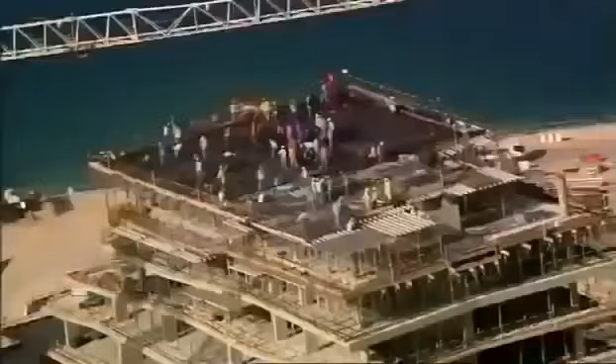Abu Dhabi, the richest city on the planet. It wants to join the City Super League and is undertaking an incredible transformation, building this extraordinary skyscraper, Aldar HQ. Nothing like it has ever been attempted. It'll be a race against the clock. Will this megastructure push even Abu Dhabi to the limit?

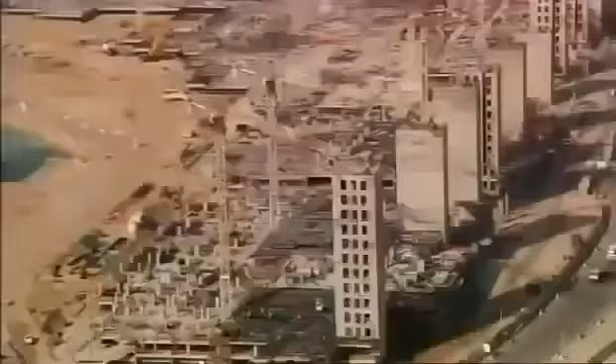Abu Dhabi is in the midst of a construction boom. It's the largest of 7 sheikhdoms known as the United Arab Emirates. Its capital, also called Abu Dhabi, is the richest city on earth. Its ruler, Sheikh Khalifa, has a cool $875 billion in the bank and an audacious spending strategy to match. He wants to transform the skyline and compete with the international elite of London, New York, and Hong Kong.

But this is not the first time the Emirate has stood at the crossroads. Just decades ago, Abu Dhabi was a desert backwater, until the discovery of oil in 1958 brought unimaginable riches to its ruler, Sheikh Zayed. As the petrodollars flowed in, he converted the shell houses into high-rise, and the traditional way of life was swept away.

Today, Abu Dhabi is a thriving metropolis, sitting atop the world's 5th largest oil reserve. But black gold alone cannot put this city in the Super League. To do that, Sheikh Khalifa must lure big business and tourist dollars. Abu Dhabi must expand to thrive.

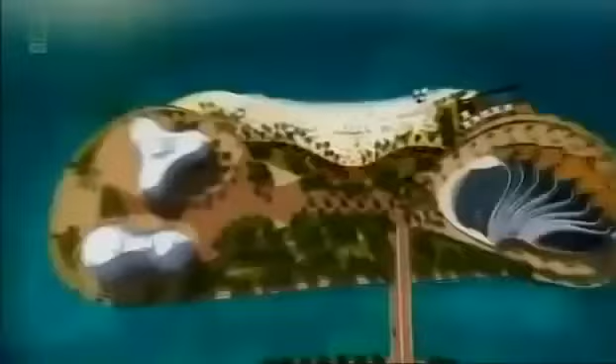To put Abu Dhabi on the world map, fledgling property developers Aldar plan a whole new micro-city, Al Raha Beach. It's an ambitious proposal. At 11 kilometers long and almost a kilometer wide, this city on the sea will be the biggest project ever attempted in Abu Dhabi's history. Mohammed Al Mubarak is in charge of delivering this audacious development. The vision of their highnesses and the vision of Aldar was to create this almost mini city where people can live, study, play, and work in one destination.

Al Mubarak must attract investors if Al Raha Beach is to succeed. So to launch the project, he commissions a signature skyscraper. Creating an iconic structure on Al Raha Beach was of vast importance on basically putting Al Raha Beach on the world map. Al Mubarak sets Lebanese architect Marwan Zgheib the task of designing an icon that raises the stakes even higher. The building will become Aldar's headquarters in the heart of their colossal development.

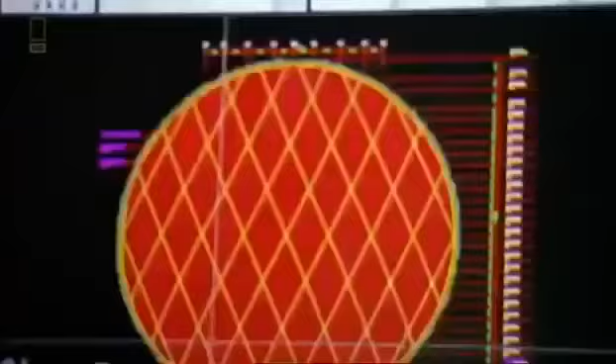But creating something new in a land where the iconic is the everyday won't be easy. Neighboring Emirate Dubai has taken center stage with a number of headline-hitting projects. The world's tallest skyscraper, Burj Khalifa, the Palm, and the World, and the emblematic Burj Al Arab. To stand out from the crowd, Zgheib knows he must redefine the extraordinary. Simple can be powerful sometimes, and especially in architecture. You can see it since the pyramids of Egypt. Most of the iconic buildings are very simple buildings.

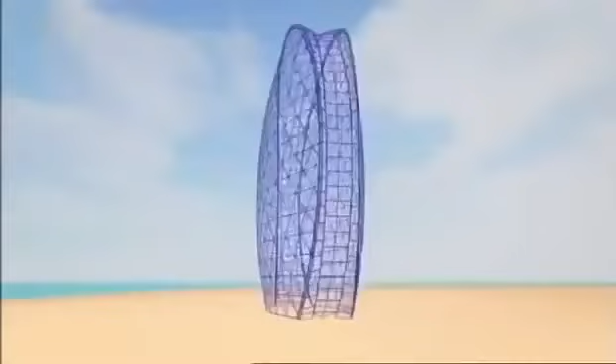But it isn't until Zgheib is relaxing on a plane that he has a brainwave. But I couldn't sleep, so it was a moment of relaxation, you know. And then the idea came simply. So I took a pen and I drew it on a sketchbook. The design is simple but daring. A round skyscraper taller than the Statue of Liberty, with a curved glass skin covering the area of 4 football fields. To be honest with you, the moment I imagined it, I knew it was a winning concept. I knew it was something different.

In fact, the design is so unusual, Al Mubarak initially doesn't know how to react. And when I first looked at the MZ design, I was a bit confused in the beginning, to be honest with you. I felt like I was looking at a comic. I felt that this was a flying saucer and basically it landed on Al Raha Beach. And I just kept on staring at it for like another 15 minutes. And after 15 minutes, I just fell in love with it.

Zgheib's design is inspired by nature. 2 giant circular curved walls of glass mirror an open clamshell. Architecture is nothing but imitation of nature. At the beginning, the idea was so geometrical, very pure. It's like a seashell. The seashell has deep meaning for Abu Dhabi with its seafaring heritage.

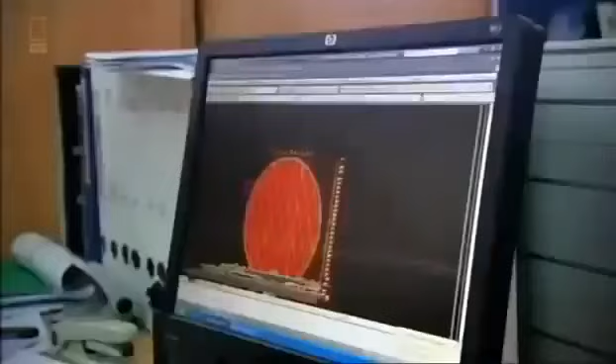But a circular design poses a problem. Just like a coin that stands on its edge, it risks being unstable. The circle must be balanced. So Zgheib turns to some very old school geometry. The real challenge of the circular facade was to find the 2 points where the building should pose on the ground. And for that, I had to go back to one of the oldest rules in architecture, proportion. When you have a circle, you can divide it into a pentagram.

And that pentagram, in fact, is a representation of the cosmic body of the human being. So you can put a man in that pentagram, the man and the universe. So the pentagram will define the 2 points of the circle where the facade will lay on the ground. And this will create the perfect balance.

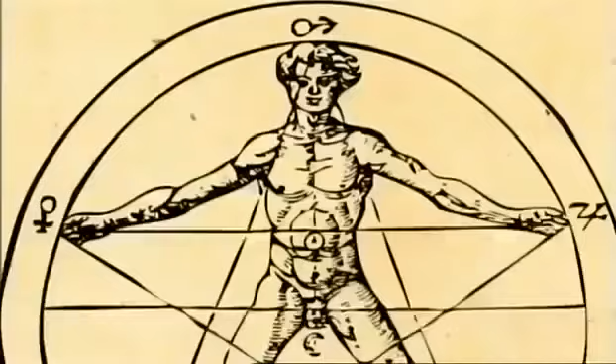It was the same thinking that led 16th century philosopher Heinrich Agrippa to draw man as a pentagram inside a circle, and has helped architects to proportion buildings for centuries. But it's not the skyscraper itself that poses the first major challenge. It's the proposed site. They wanted to show me the site, but all you can see was the sea, nothing but the water.

Unbelievably, the solid ground required for Aldar HQ does not yet exist. The desired location is 700 meters out in the Persian Gulf and 8 meters underwater. New land must be created. Over 3 million cubic meters of sand must be found. Surely a simple task with Abu Dhabi's endless desert dunes.

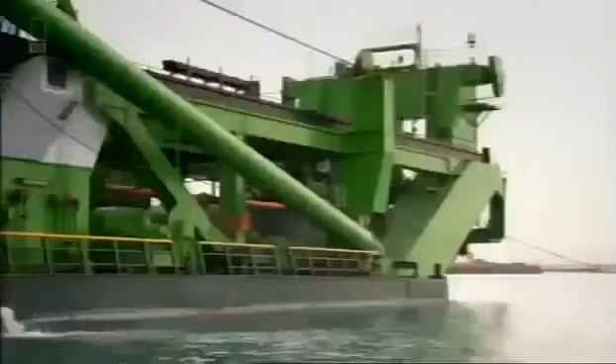But desert sands are too fine to build with. The land would just slide into the sea. Marine sand is needed. Its larger grains help it stick together, creating the perfect base to build on. Dredging sand from the seabed is one solution, but fortunately, the late Sheikh has already done the job for them.

Whilst cutting a shipping channel in the late 1970s, Sheikh Zayed created an island of discarded sand. Luckily for the engineers, it's just across the water, so they decide to move all 20 million cubic meters of it. A fleet of cutter dredgers eat their way into the island.

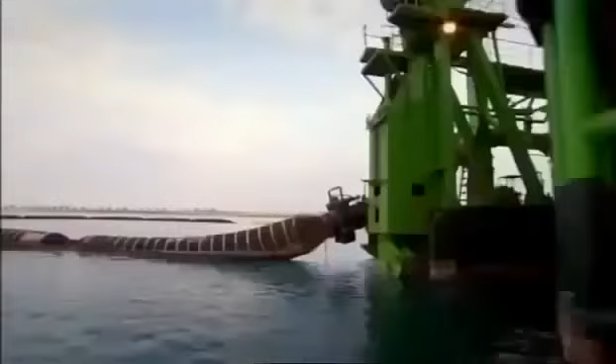These are no ordinary dredgers. It takes an enormous claw layered with 48 reinforced steel teeth to slice through the hardened sand. The sand is pumped through a floating pipe to the construction site. Here, excavators toil 24 hours a day to flatten the virgin ground. After 8 months, the land for Aldar HQ is fully formed, and with this, the first major problem overcome.

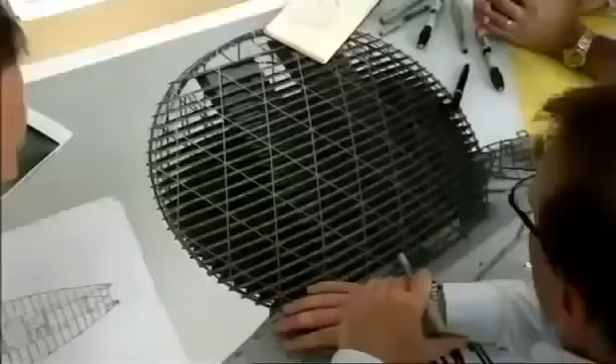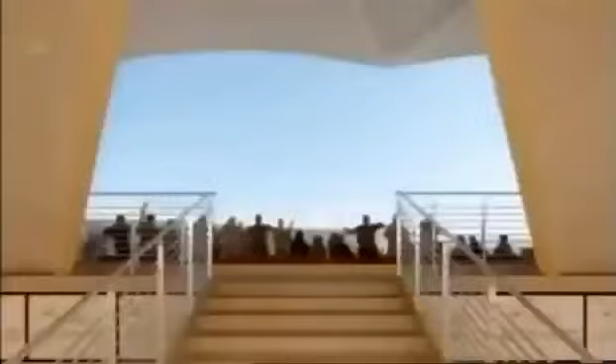Aldar want their skyscraper completed by an astonishing deadline. In just 30 months' time, the eyes of the world will be on Abu Dhabi when it hosts its first Formula One Grand Prix. The racetrack will be on its own designated island, complete with hotels and theme parks. And Aldar are building the lot.

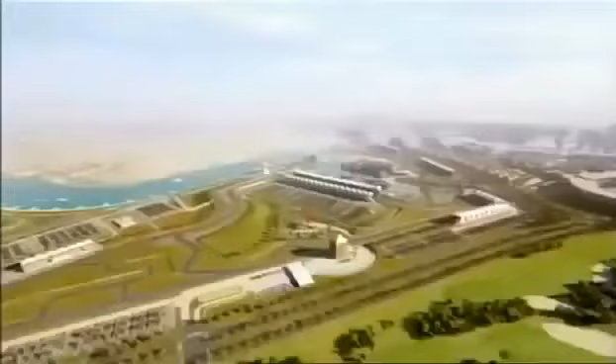The international press and tens of thousands of visitors will descend on the city. It's the ideal opportunity for Aldar to showcase their new HQ. But to stand any chance of meeting this target, the team will have to pull out all the stops. Just 1 month after design has started on Abu Dhabi's round skyscraper, the construction team arrive on site to begin foundation works.

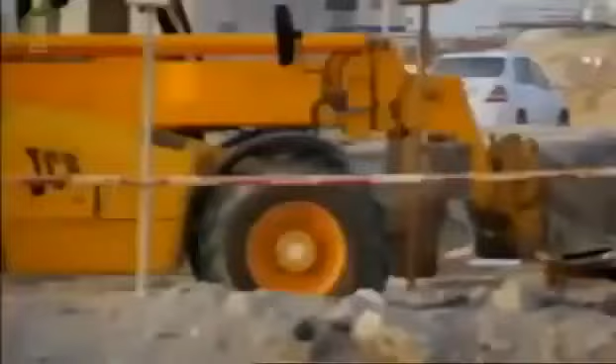For construction manager Miles O'Sullivan, the schedule is a shock. With the design not complete and being told you're going to pile in 1 month, almost crazy. But it's not just the first deadline O'Sullivan has to worry about. Aldar HQ's round curved shape presents an enormous sail-like area when wind strikes. Wind tunnel tests must be done to prove the foundations can take the strain. But the results won't be back until work has already started.

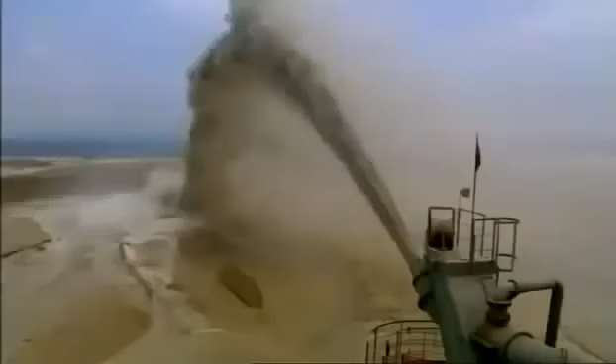Abu Dhabi is regularly hit by high-pressure winds that sweep in from the Persian Gulf. But building Aldar HQ so close to the sea will put the foundations under another kind of pressure. Digging for Aldar HQ is very similar to digging here in the sand. As you dig down, you'll get to see the groundwater starting to surge through the sand. And in fact, it's that groundwater coming through the sand here that's creating the pressure and obviously creating the issues for us when we do the construction.

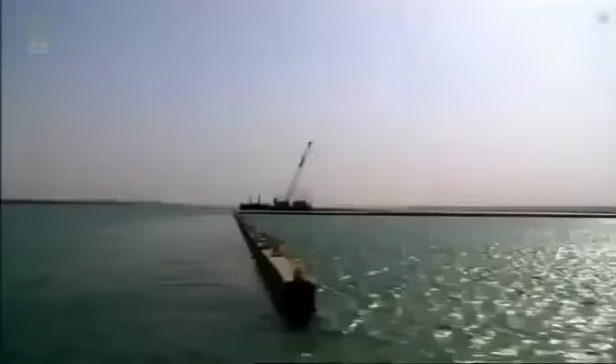The upward pressure of the water and the loose sand pose a problem for foundation construction. Before excavation can begin, the team must build a solid barrier called a diaphragm wall or D-wall. It's a concrete barricade formed of interlocking panels which socket into the bedrock and reach 16 meters below the surface. The D-wall holds back the loose sand and the surging seawater, ensuring the ground inside the barrier can be removed. These areas here, what are these?

The D-wall must be built before the foundations can be laid. But with the blueprint above ground a work in progress, the team can only hope that over-engineering the foundations will make them strong enough. The design calls for about 400 concrete piles that work in two ways. Half of the piles rely on friction with the ground to secure the structure to the rock and sand below, whilst the remaining piles drive deeper into the rock to dissipate the building's immense loads into the ground.

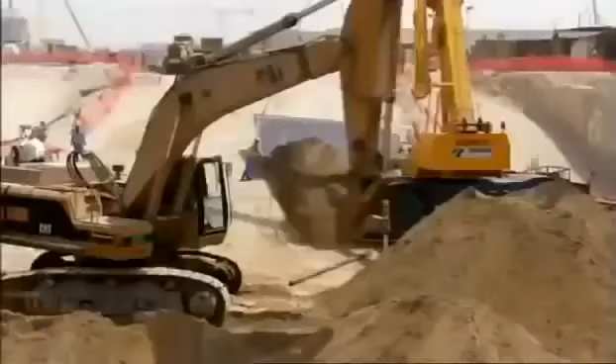On site, D-wall construction begins. It's the same process ongoing at this Abu Dhabi construction site.

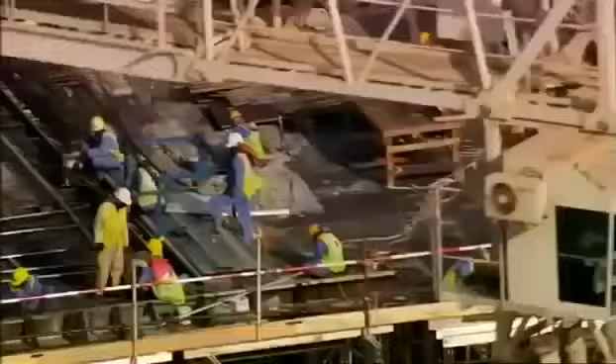Until recently, Al Raha Beach was just a vision for Aldar's Mohammed Al Mubarak, but the dream is slowly emerging from the sea. Seeing that land come up, seeing the amount of work and the amount of staff we had on the ground to make sure that was going to be done, that was like watching Rome being built.

The D-wall and concrete piles create a firm foundation upon which to build Aldar HQ. But the force of the sea pushing up through the sand still poses a threat to the skyscraper. A great way of demonstrating the problems we faced at Aldar HQ with the groundwater is in imagining that this bottle here is Aldar HQ.

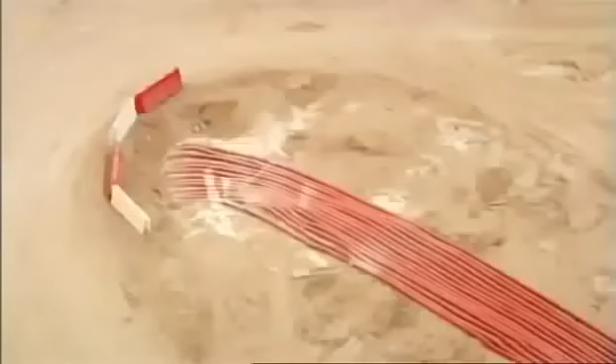And as I push the bottle down, you see forces are exerted on my hand. And in fact, that's the groundwater trying to push the building out, trying to push Aldar HQ out of the building site. To keep the site dry during construction, water is sucked out of the sand and pumped out to sea. But that's only a short-term solution.

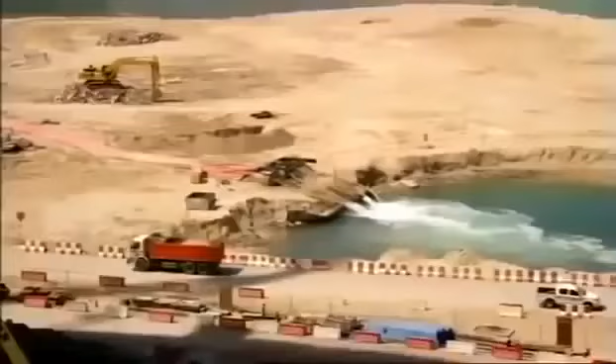To protect this skyscraper in the long term, the team need an extra defense. It's a giant slab of concrete called a raft. It creates a barrier against surging water, stops the piles from punching up through the building, and acts like a snowshoe to evenly distribute Aldar HQ's 59,000-ton weight into the ground.

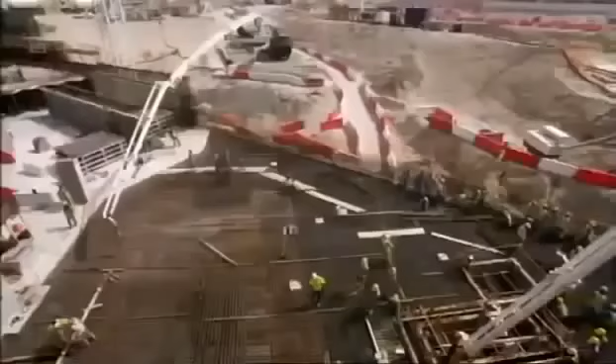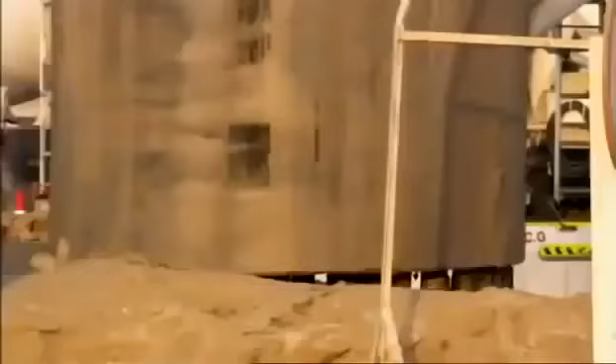Raft construction for Aldar HQ is 12,000 cubic metres of concrete, which is a 30,000-ton structure. It's a huge element. With 2,000 truckloads of concrete to pour, it's a job that continues into the night. But engineers are just getting to grips with the severe forces that will affect the piles.

The unique shape of the skyscraper will capture wind like the sail of a yacht. There are no guarantees the foundations will be strong enough to cope with the loads. The advanced construction works had to commence so quickly that we didn't have time to do the wind tunnel test. It was important that we did one, primarily because this is a unique shaped building.

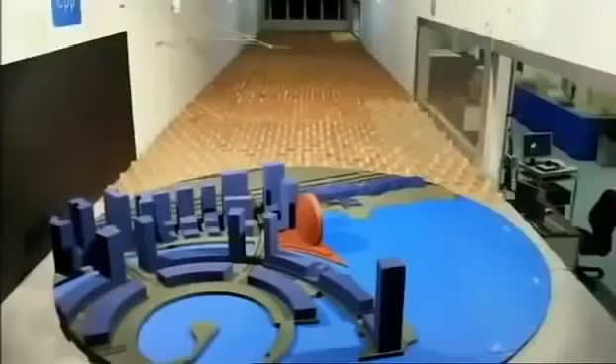Gibbons calls upon wind engineer Roy Denoon in Colorado, USA. He puts a scale model of the HQ through its paces in his high-tech wind tunnel. Right at the start, Craig Gibbons actually called me and said, "We've got something really unusual coming up. Can you take a look at it and give us your first best guess of what the wind loads might be? Give us some guidance on how to get to some loads for the foundations, because this is running on such a fast-track schedule."

Knowing that Gibbons is already building the foundations, Denoon wastes no time in firing up the fans. If the tests reveal the wind loads are higher than predicted, the foundations already in the ground may have to be redesigned. To be putting in the foundations before we could finish the wind tunnel testing, that always gives us a little bit of cause for concern. Denoon is right to be worried.

He knows how high-altitude wind impacts on very tall rectangular skyscrapers. But Aldar HQ's lower height means another type of wind is the threat. When we look at the really extreme wind speeds in the Middle East and in this region, we find that the highest, what we call gust wind speeds, the short events, are caused by thunderstorms.

Abu Dhabi may appear sun-soaked, but during the spring, the intense sun heats the moist air, causing spectacular thunderstorms. Wind speeds can escalate up to 137 kilometers per hour. The key issue with thunderstorms in this region is that they give the absolute highest gust wind speeds. Now, for the very, very tall buildings, that's not too critical because they occur down low. For Aldar HQ, they were really critical.

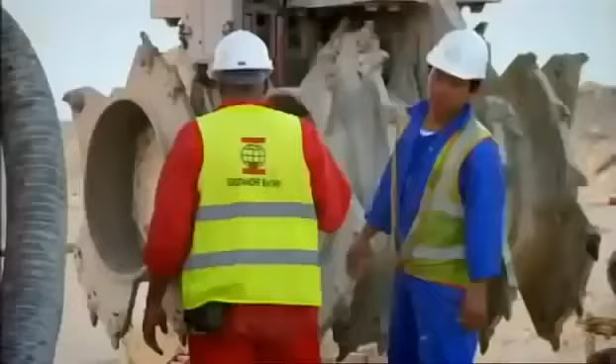The results of the wind tunnel test are great news, but the relief is short-lived. Now the structure needs a super strong backbone or core. But again, conventional building won't fly with this design. For Aldar HQ, one core wasn't enough. We needed two cores, in fact, to take all the loads down into the structure.

Aldar HQ needs two concrete cores for extra stability. The twin spines rise a full 125 meters from the concrete slab to level 23. Reinforced with 6,500 tons of steel, these cores will transfer the loads into the piles. But to channel these forces safely, the concrete must be cast without any flaws.

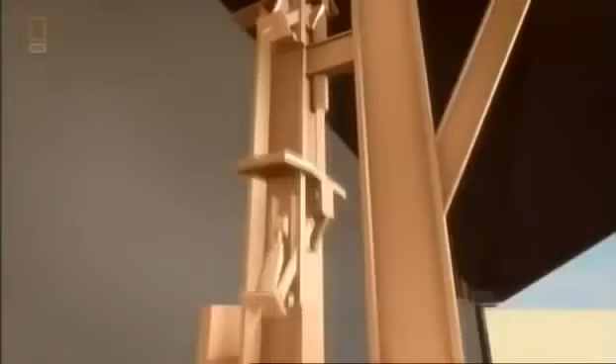They need a way to build the cores as two single pieces of concrete. The answer? To slip form. It's a clever way to build big concrete towers. Liquid concrete is poured into a giant mold, which forms the shape of the structure. The mold slowly climbs up the core as it's cast, forming a single concrete tower without any joins.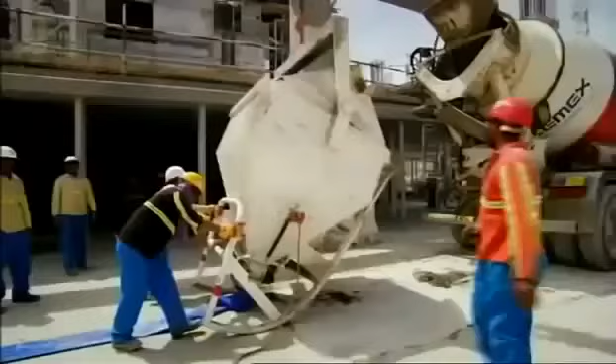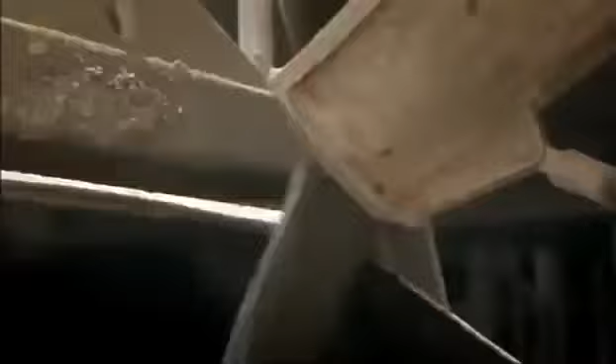Seamless concrete will ensure the HQ's cores are strong. But these 125-meter backbones must be built in only 6 months. It's the same process ongoing at this Abu Dhabi construction site, led by the Aldar HQ team. We are calculating how much per hour we need to climb, and then how much concrete we need to place in every hour. Slip form is fast, but on this schedule it's not fast enough.

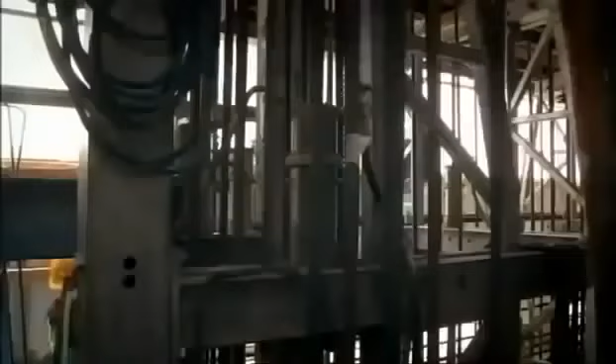O'Sullivan has a trick up his sleeve to speed up construction. We set a challenge to both cores, who could get up there first. The teams battle to reach each level before the other. The cores grow meter by meter under a constant cycle. The concrete is released and poured around the steel reinforcement. Hydraulics anchored to the structure raise the mold or shutter so that the next layer of concrete can be poured.

Manpower is a key focus because slip forms are very labour intensive. You need to make sure that the guys are on deck, they're there at the right time, they're doing the right works. 4 months into core construction, the two teams are neck and neck in the race to the top. Core 1's team leader keeps a close eye on Core 2's height.

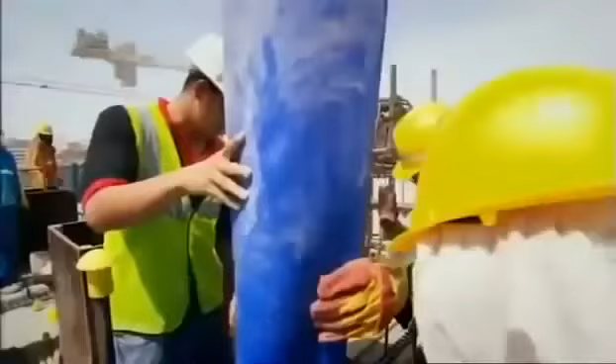It's been my benchmark, so if I'm doing better, I'll be ahead of them. So a lot of pressures are there. My boss is telling me, do this, go up, go up, go up. But it's good, the pressure is good. Core 2's leader also feels the strain. I'm working 24 hours today. I try to finish earlier than the other core.

Every month, the builders pour enough concrete to fill 1.5 Olympic swimming pools. But the teams aren't home and dry yet. There's still a challenge to finishing. Cores are renowned for going up quickly and sometimes having problems, so there's a lot of coordination effort that goes in to make sure that they do go up on time. We had structural steel elements to cast in. We had crane connections to get right.

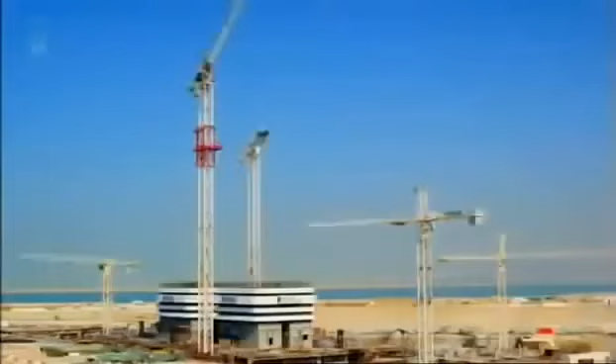After just 6 months, the two cores are approaching the top. Core 2 is only a meter or so behind, but Core 1 push ahead to victory. Core 1 won the race. It's really good to know that we're on top. For O'Sullivan, the contest to build the cores in record time has paid off. A lot of planning goes into the cores. To see it come off, a fantastic feeling. But it's only a stepping stone, the core construction. There's a lot more to go on.

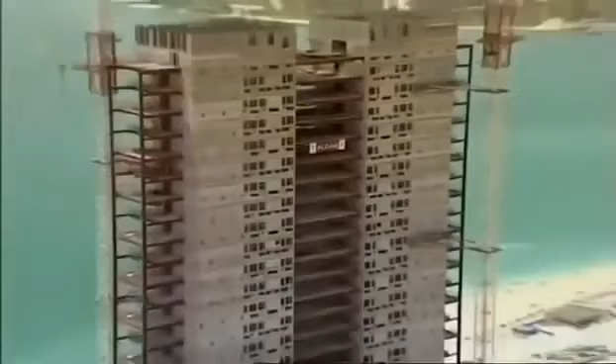The team have so far overcome the obstacles to bring Aldar HQ to life. But now they must face their most complex challenge to date. 1 year in, and Abu Dhabi's radical skyscraper is beginning to take shape. But with only 19 months to the deadline, the engineers must crack how to build Aldar HQ's vast external shell.

The design demands a heavyweight shell to support its wide girth and survive huge wind loads. But the architect stipulates open office space, floor-to-ceiling windows, and panoramic views of the Persian Gulf. In the United Arab Emirates, the shells of rectangular skyscrapers are built with concrete.

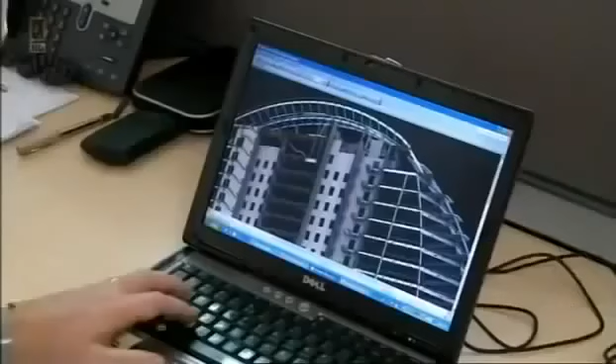But the geometry of Aldar HQ's shell is so complex, it must be built with the precision of a Swiss watch to fit together. On this scale, achieving millimeter accuracy with concrete is practically impossible. We knew at the outset a wholly concrete building was never going to work in this instance. And Stuart, I understand that now we've been able to get a high degree of repetition through. And there we go. The engineers need another solution.

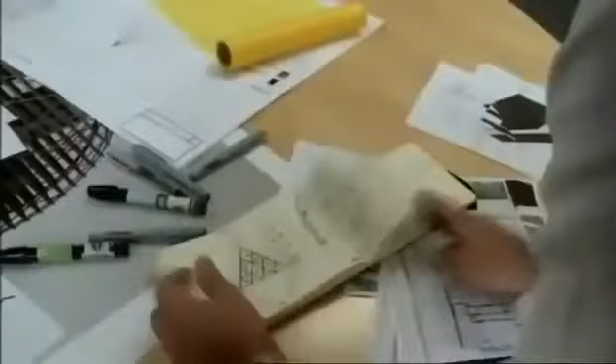The steel exoskeleton should make the architect's vision possible, but it'll be a first for the United Arab Emirates. Constructing a skyscraper like this will be a step into the unknown. The geometry of the building presented a significant challenge to us, but the other challenge was that a diagrid building, or buildings using this diagrid system, had never been built before in Abu Dhabi and the UAE. Let's have a look at it if you don't mind.

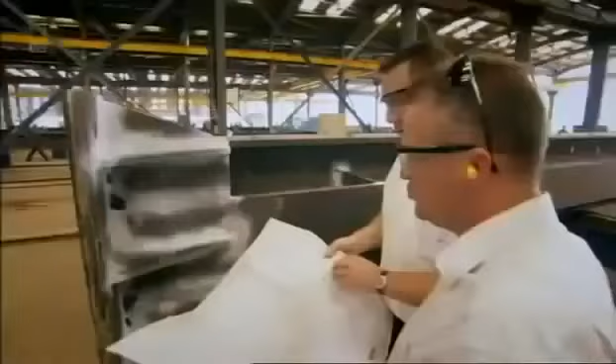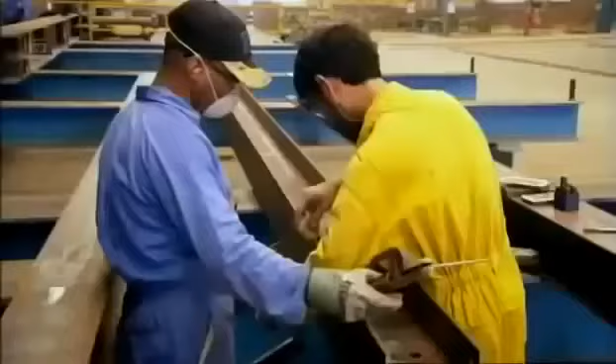It'll take expert steel fabricators to pull this job off. When we first saw the design, it was something that we knew we had to put our most experienced guys on. The structure's very, very complex. The army of fabricators work in shifts around the clock to cut and weld 2,500 tons of steel. The factory is building a series of A-shaped steel sections, weighing up to 30 tons each. They will connect together to form the structure's signature curves. But if manufacturing these giant A-frames is not a big enough job, lifting them into position on site will be a major challenge.

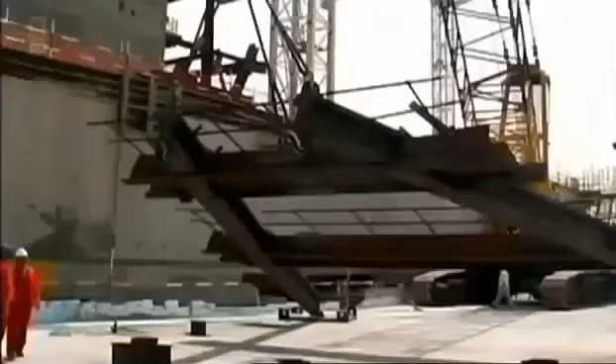Great to see the steel arrive for the main diagrids, the main columns to the structure. Huge sections. The thought of actually starting the steelwork some 18 months after we started the job, fantastic. But excitement of the first A-frame delivery is soon replaced with trepidation. Lifting these monsters will be a precision job, and tensions run high. When we rigged the first A-frame up, you've got to put all the chains on it. It would take maybe an hour to rig it up, and everybody's then thinking, I hope this is going to work. Everyone is on tenterhooks.

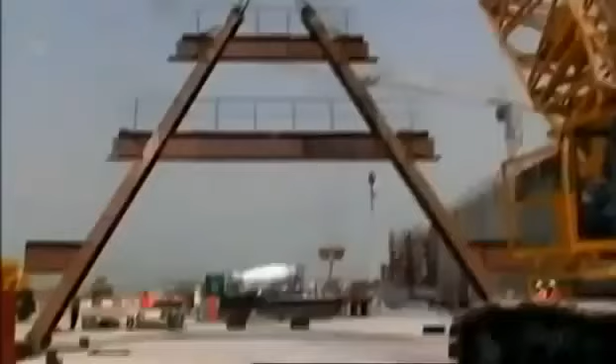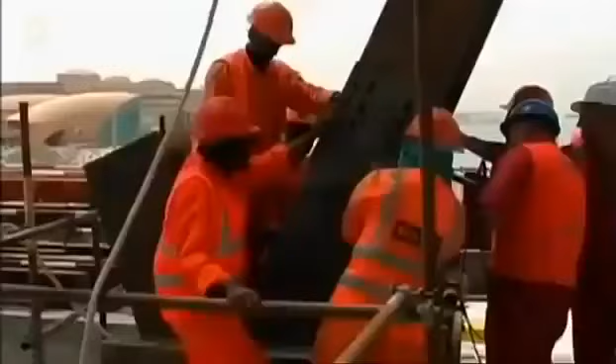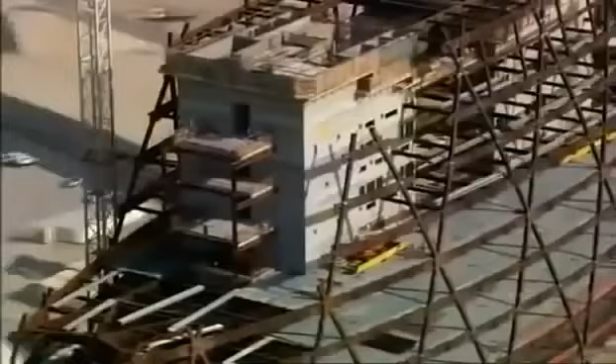Now is the moment of truth. The A-frame is lifted off the ground. There was a big ah from the crowd when it went in. The first exoskeleton section is finally bolted to the base plate. To see one go in, an amazing feeling. First A-frame up. Again, a milestone achieved, but then a lot more to go. Another 99 A-frames must be fitted to form Abu Dhabi's unique skyscraper. The handover date is now just 19 months away.

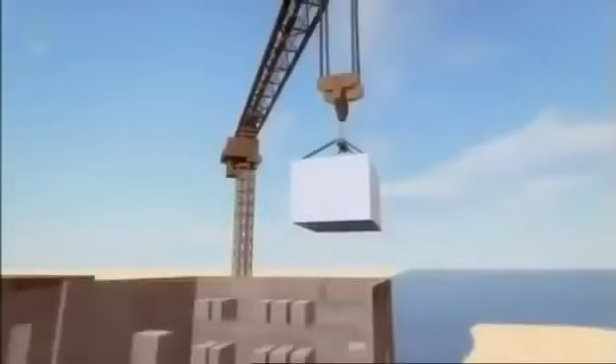So the team must now focus on the HQ's interior. The structure needs an alarming number of restrooms, 85 in total. This is no weekend DIY job. It'd take an army of plumbers and time the schedule cannot spare. So to fast-track the task, the team innovate again with prefabricated washroom modules or pods. A pod is a factory-made restroom, complete with lavatories, basins and mirrors, ready to plug into the building. The team plan to lift these 12-ton pods by crane and lower them into the cores like a giant game of Tetris. Construction is a finely tuned sequence. The pods have to be in before the exoskeleton blocks access to the cores.

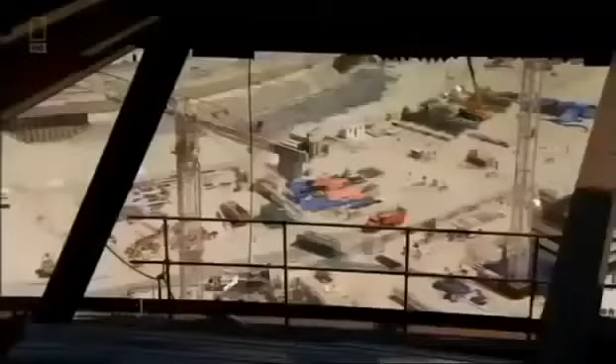Aldar must approve the design fast, but there's a problem. We produced a lot of visuals and graphics which we had signed off. Then we actually built the pod. We went to look at it at the factory and a lot of people thought that's it. But Aldar unexpectedly rejects the pod design. It's just too ordinary for such a futuristic skyscraper. It will take months to remodel, and the exoskeleton can't wait. The whole plan could go down the pan. The only option is to leave out 2 roof sections and drop in the pods later, but this has its own dangers. With zero hour looming, the team must now wrap the building's skeleton with a glass skin. And no one has ever built a glass facade like it.

The geometry of Aldar HQ is highly complex. 2 giant bowed facades cover an area the size of 52 basketball courts. A third narrow surface joins the round facades like a zipper, arcing an extreme 290 degrees from one side to the other. But curved glass like this doesn't exist. The engineers need another plan.

The secret to covering a curved surface with flat glass is its shape. Square glass isn't an option. Squares can only bend in one direction at a time without distorting. Aldar HQ needs triangles. They can pivot on 3 axes and seamlessly join with their neighbors. To form these complex curves, it'll take 25,000 individual panes.

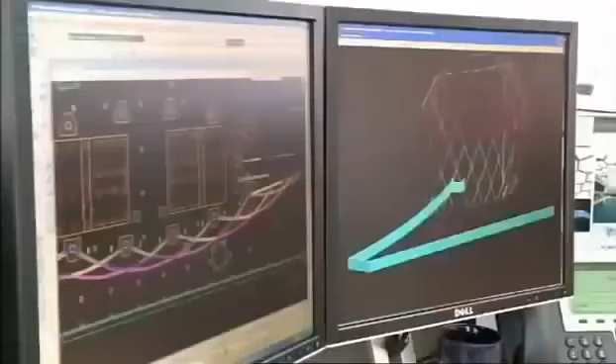But before glass production can begin, the team must know what wind pressures it will face. It's back to wind engineer Roy Denoon, who must test the design in his wind tunnel. When we first saw the design, we knew there was some potential for some quite high glass design pressures. If you under-design a pane of glass, then it will be sucked out the building. The large facades are most likely to cause trouble.

The biggest loads on the overall building are the winds coming flat into the wide face, so it's capturing it almost like a sail. The wind comes into the centre and spreads out around the building, and where it separates and splits away from the building around the edges, that's where we see the largest pressures. The pressure is like a big SUV hanging off the outside of each panel.

But that's not all Denoon's test reveals. The circular shape of Aldar HQ creates another problem. When we initially saw the design, the sharp edges threw up this warning flag that said, look, we can get some pretty large pressures here. Where the wind hits the edge of the narrow strip of glass, it spirals in on itself, creating a vortex.

You see this recirculation of the flow. It separates away, and you get this little bubble on the surface where the wind isn't hitting, and then it comes back in to meet the surface again. That's typically an indication that that's where your highest design loads are occurring for your glass. And that very, very strong suction force is what that little bubble means. To stop wind sucking glass out of the HQ, each pane must be beefed up with thicker glass and a stronger frame.

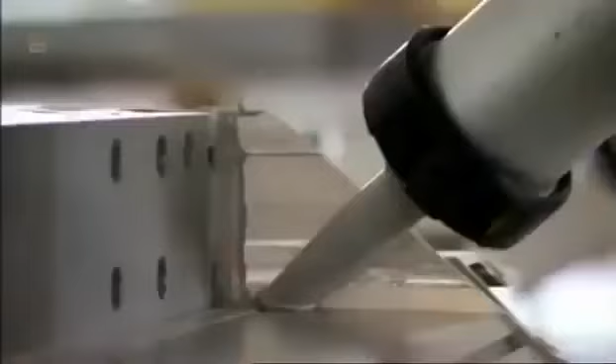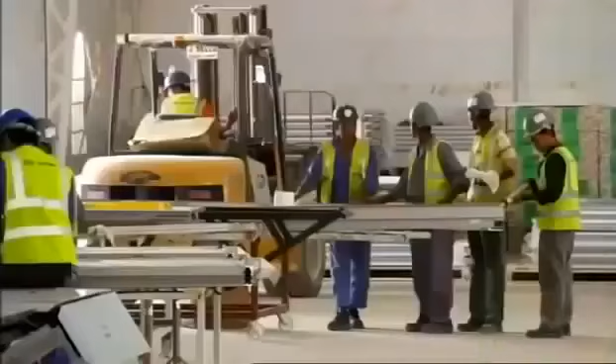But that does nothing to limit the scale of the job ahead: installation. You talk about 25,000 pieces of glass to do that for the building in 10 months. It's a monumental effort. It's a constant battle, making sure that you get the glass to site. But having the glass factory on site is a lifesaver. It made it easier for the site to actually call up on glass. Once they were installing the panels and ran out of glass, we're immediately on the phone, hey, we need more panels over there. So we got them on a truck, and 5–10 minutes later they were on the site.

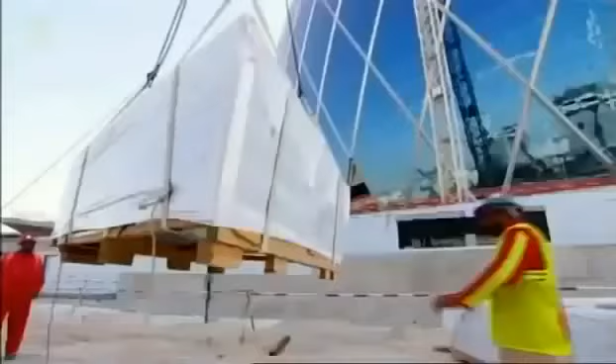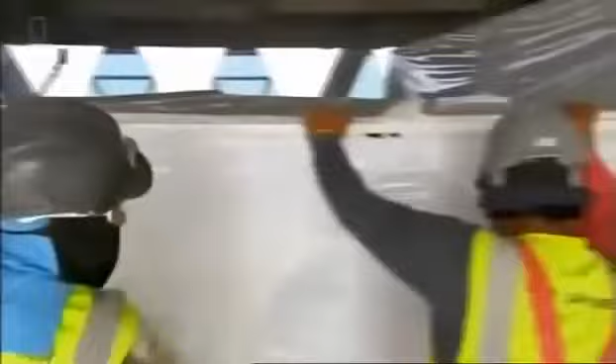The glass factory sends the panels to the site by truck, and the panels are lifted by crane up to the installation team. The constant pressure was the program. The glass is pulled onto the floor plate, but it takes a team of 8 specialist riggers to install the panels. Probably the hardest thing was the sheer volume that had to be installed. Fixing glass on a curve at this height means the panels have to be swung out from a platform that hangs out of the building.

It should be easy, but then this team have Abu Dhabi's wind to contend with. The wind here can just blow in from nowhere. It caused us no end of problems. The glass would start to revolve and spin. We would get a choice whether to lift it, bring it into the building, put it down, or to put it straight back down on the ground. They were decisions that had to be made on the spot. And you don't want a large panel coming down from 20 stories. Just contemplating that, it doesn't bear thinking about.

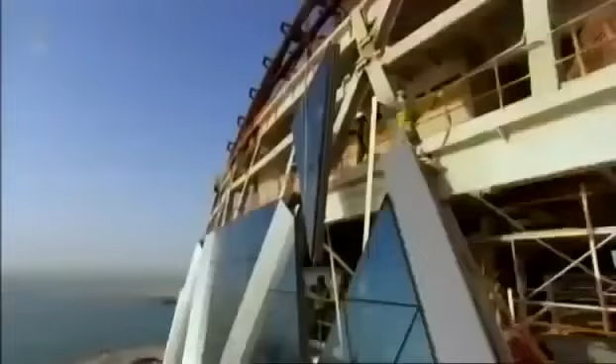This glass panel makes it into position in one piece. But the team have another 29 to install every day if they're to meet their targets. We got it up to 30, 32 on average, and I think the best day was over 40.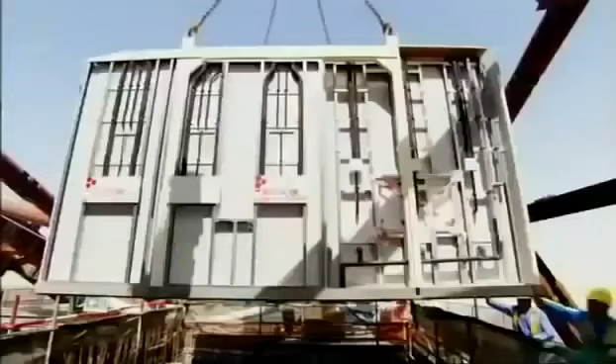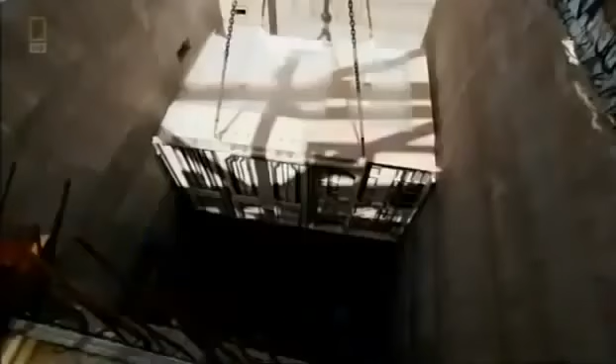The pod drops are quite quick. We hook them up, we take them up the 140 metres to the top of the tower crane. The pod can now be lowered into the core shaft. It's a tight fit with just 75 millimeters of clearance. When I saw the first pods in, it was a relief that that saga was over and we'd actually managed to achieve what the client wants. The pods are on the move, but the long delay has serious consequences. Finishing the exoskeleton should be a straightforward task, but the incomplete steel roof has sagged out of shape.

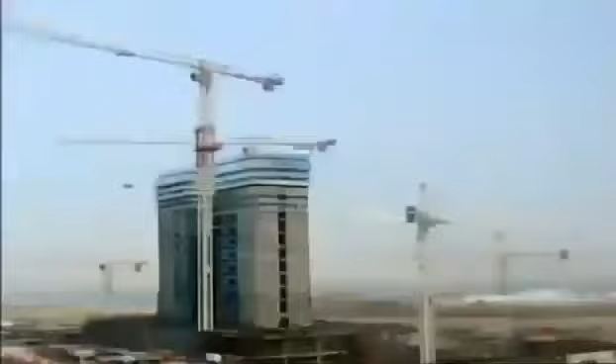Eight months from the deadline, and the world's first spherical skyscraper is fast approaching completion. But with the end in sight, construction hits a serious snag. The delay in fitting the washrooms into the cores has forced the team to leave the roof arch open, causing the steel to slouch out of shape.

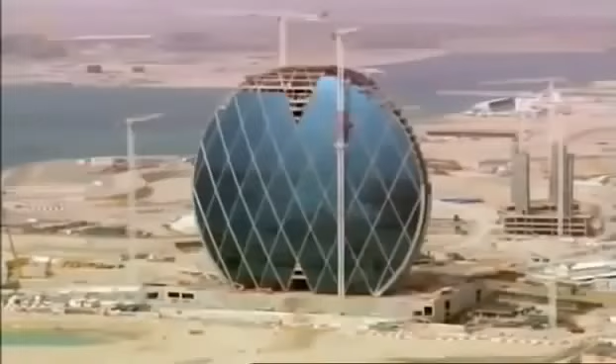The arch of the HQ's lightweight roof is the key to its strength. Its curves evenly distribute the forces down into the foundations. But if any elements of the arch are missing, the forces cannot flow away. The roof will sag under the weight.

To discover how serious the slump is, the steel is surveyed. I've made a phone call to our site supervisor, Bob, and asked the question of what the actual sag was recorded, expecting it to be around about 50, 60 mil. When we got the figures of 150 millimetres, I was a little bit shocked.

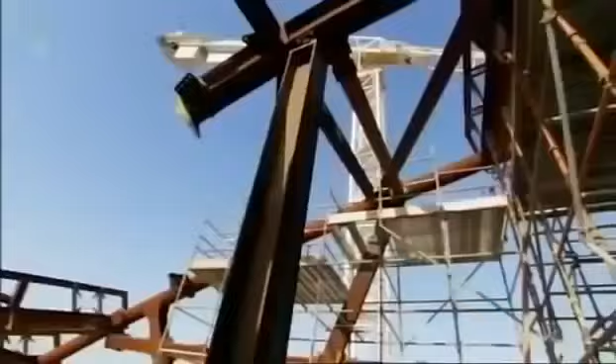With a building that relies on precision engineering, a 150mm sag is a huge problem. The roof will not slot together. The brackets to connect the remaining 40 glass panels will be out of alignment. There is no time to redesign. The team have to somehow make the roof steel fit together. The only way is to lift the entire roof into position, and it weighs a staggering 200 tons.

Even for experienced steel engineer Bob McPhee, this is a serious undertaking. I hate it when you start waking up thinking about your work. I've never liked to do that.

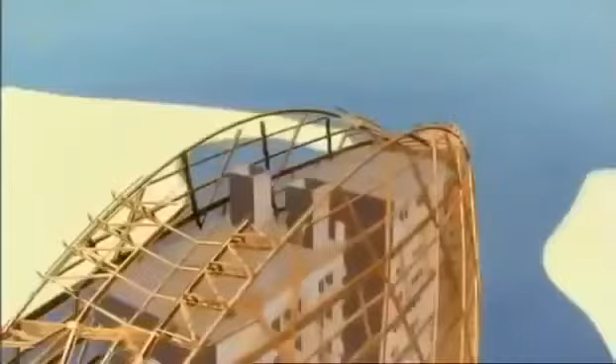To lift the roof arch, 2 hydraulic jacks are positioned on top of a load-bearing wall, carrying 80 tons of weight into the core. 2 more jacks are propped with 16-meter-tall steel columns and channel 40 tons each into the concrete floor of level 23. The props are packed with steel slabs to hold the roof in position as the jacks are raised.

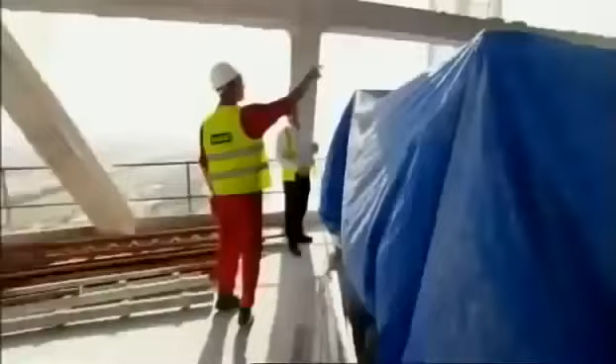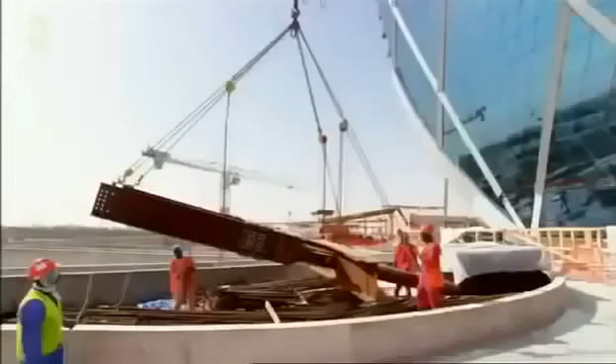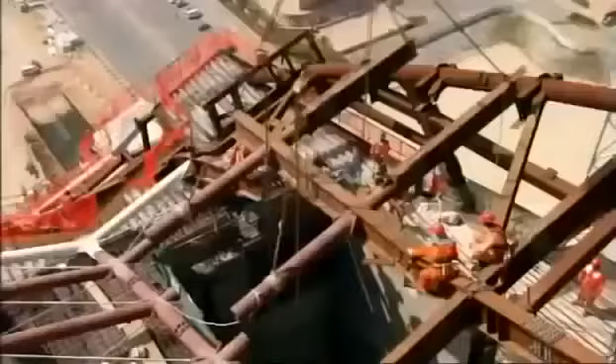The roof was moving firstly a couple of millimeters, then 5, then 10, then gradually into its position 20, 50, 100, and then into its final position 150 millimeters. The entire roof is raised by a whopping 170 millimeters. The slumped arch is finally in the right position. All that remains is to lift the last steel section. It's a tight fit. With a millimeter to spare, the roof is finally complete.

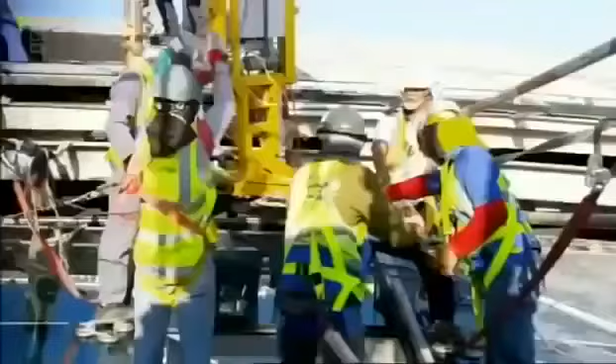With just weeks to spare before Abu Dhabi's first Formula One motor racing spectacle hits town, all of Aldar HQ's 25,000 glass triangles are in position, except one. The glass installation team lower the pane inch by inch. No one wants to be responsible for shattering the last sheet of glass. It's a defining moment for the team. Finally, the last pane slots into place.

Ecstatic. Actually see the last bit of glass go in. Amazing feeling. Hopefully the guys here feel the same way, and I'm just overjoyed. Against all the odds, and in just 30 months, the team have fulfilled their brief.

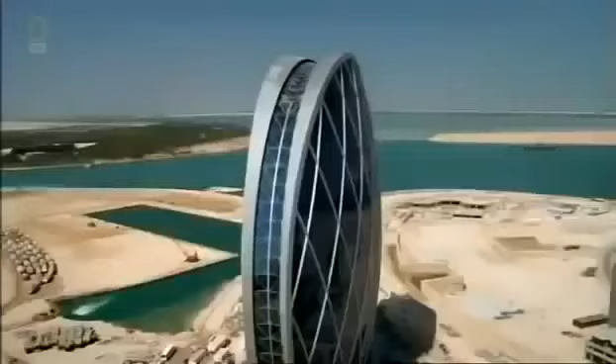An engineering triumph. This is Aldar HQ. This circular skyscraper, a world first, rises 110 meters above the Abu Dhabi sands. All 25,000 glass panels mirror the surrounding landscape, reflecting the blue skies and the rolling sea of the Persian Gulf.

Amazing structure. You don't see any circles in the world being constructed, so to be part of that was fantastic. Mindful of all the issues and challenges and highs and lows in between adds to that feeling of triumph. Mohammed Al-Mubarak fell in love with an extraordinary idea. But will the building match his high expectations?

It's really a work of art. It's a stunning building. To me, it feels like it should be in a museum. The space is unbelievable. It's really a colossal building. When you come up front to it, it's even bigger than you even imagined. And for it to come from paper to that, it's great.

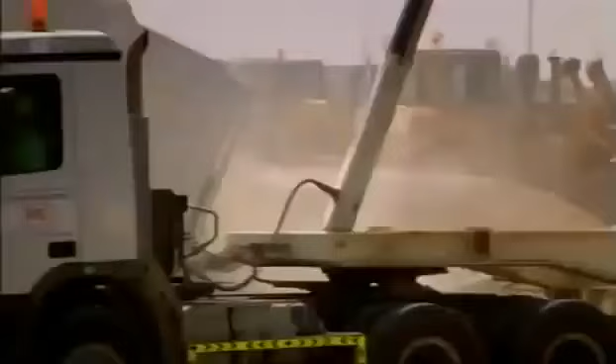Already an icon on the Abu Dhabi skyline, Aldar HQ should lay solid foundations for the future of Al Raha Beach. Architect Marwan Zgheib is delighted to see his concept sketch come to life. The building is more beautiful than the original idea because it's real now. It's no longer a simple concept.

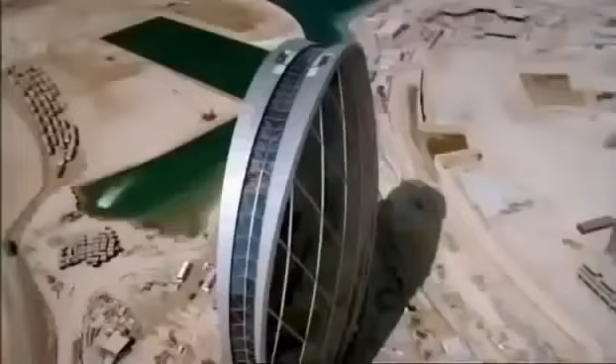It's become reality. Aldar HQ is a structure that rivals not just Dubai's iconic buildings, but can stand proud on the international stage. The HQ building has really put Abu Dhabi on the world map. If you ask me today, we're not yet into the world of Singapore or New York or Paris or London. Will we get there? I absolutely believe we will.